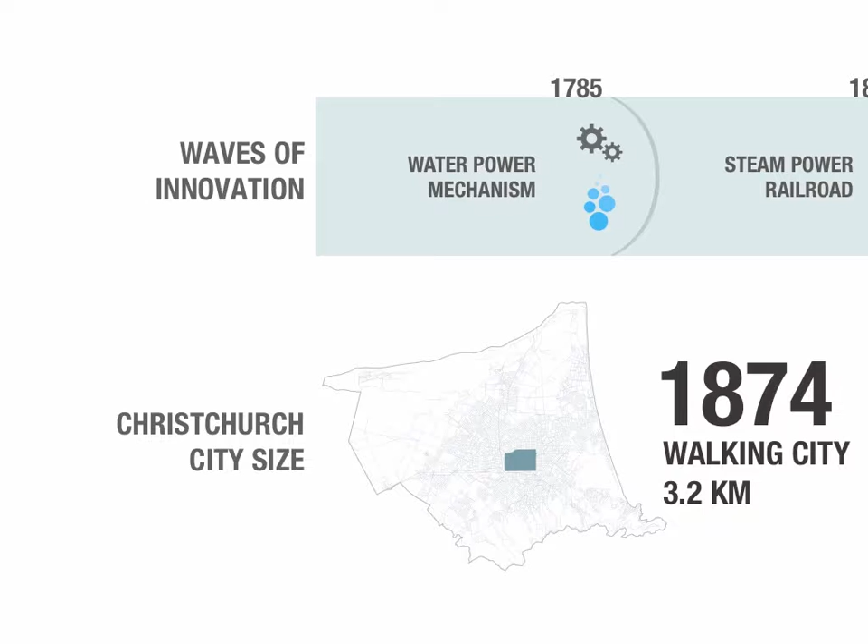Transportation technology has often been the main driver behind our city's expansion. The top is the timeline with the past waves of innovation, and the bottom is its effect to Christchurch city size. As you can see, it has evolved from a walking city to a transit city, then finally at its current state, the automobile city.

Therefore, my thesis focuses on the next stage of Christchurch. What will be the next technology that dictates the future urban form? How do we push Christchurch past the automobile city? Do we really want to keep expanding, knowing that petrol prices will only keep rising?

So in order to do that, I began investigating the current issues on personal vehicles in Christchurch. Here in Christchurch, cars are a necessity. Without cars, you have no other ways of getting around. This has been problematic for many cities around the world, but how does Christchurch actually compare with the rest of the world?

In New Zealand, it currently ranks at number 4 worldwide, with 615 passenger cars per 1,000 people. And when comparing between three major cities within New Zealand, Canterbury has the highest vehicle ownership at roughly 0.8 vehicles per person.

This preference of personal vehicle ownership leads to high demand for road widening, leaving little money for public transport due to low demands. Hence results in low public transport patronage and services, leading back to high preference of personal vehicles, and this is currently the vicious cycle of the public transport. So how can we break this?

I believe it can be done through using modern technology to effectively change our social behaviors. Because in most cases, the target problem isn't the amount of vehicles that we own, but the number of occupants that matters. In fact, 79% of all journeys to work are conducted through personal cars, but 95% of them have only a single occupant. Not only is this super inefficient, but it also takes up a huge amount of space on the road during peak times, hence the congestions.

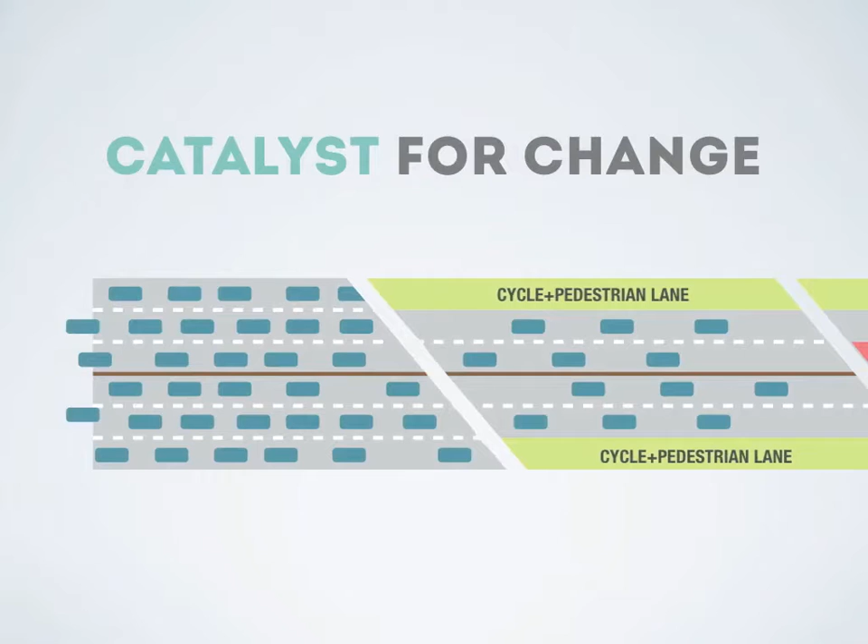This way, everyone's input can help create a much safer and friendlier car sharing community. I believe this application can act as a catalyst for many future benefits of the whole transportation system, because it has the potential to spread virally amongst its car culture population and change the urban fabric.

These amounts of abundant cheap car parking available, it is no wonder that public transport is forever suppressed by personal vehicles. These car parks, if reclaimed, can then be utilized much more usefully, such as for housing, education, parks and recreation, innovation projects from my colleagues in the other presentations.

This then brings me to my urban proposal. It is certain that the earthquake rebuild will result in an influx of workers. So, with this forecast in mind, it is very hard to ignore the lack of efficient transport when Christchurch faces an impending population spike in the near future.

So therefore, firstly, I'm proposing to revitalize the existing rail for commuter use. As the rebuild approaches, the demands for new land and new homes are expected to soar. The press has illustrated many of the existing and emerging subdivisions in the regions, a lot of which are located near the increasingly critical north to south corridor. Therefore, the fact that there is already existing rail infrastructure gives Christchurch an opportunity and access to high quality and high speed transit.

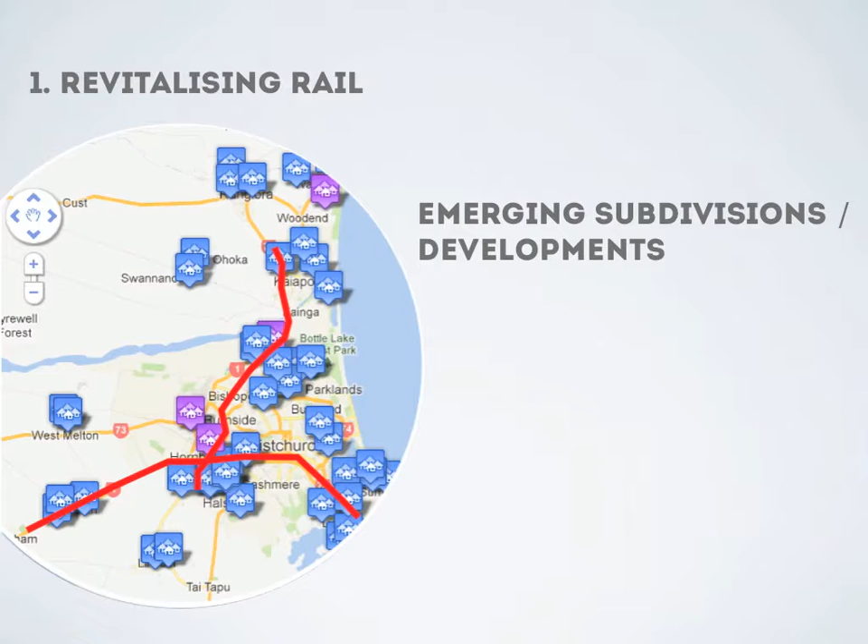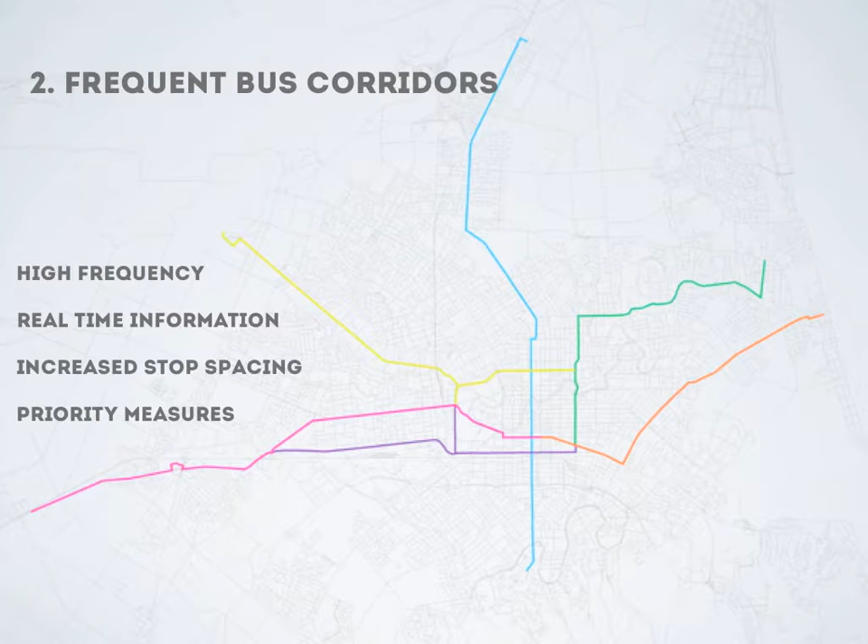This is Moorhouse Avenue on the south side of the CBD. Its current layout of a 7 to 8 lane road can be improved by changing to a median bus lane that offers dedicated space for public transport.

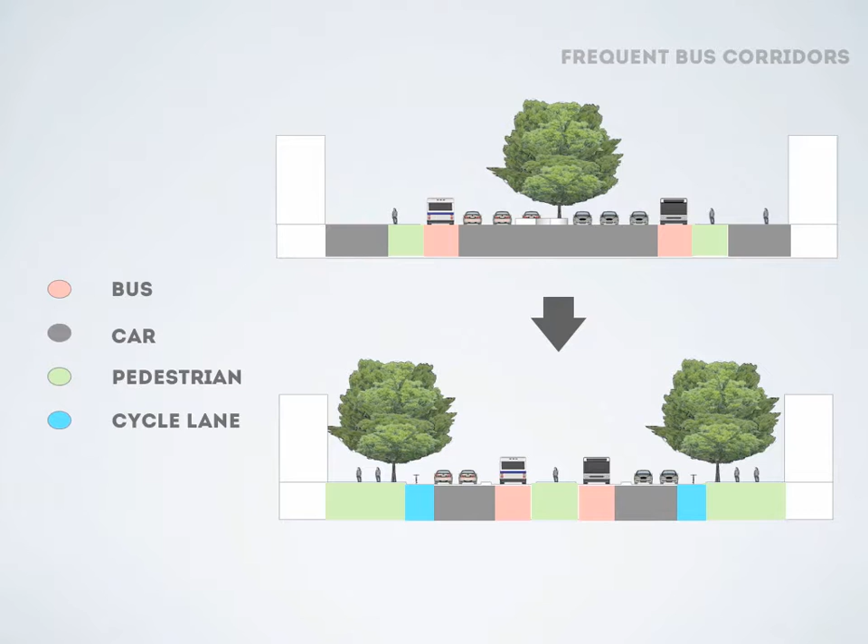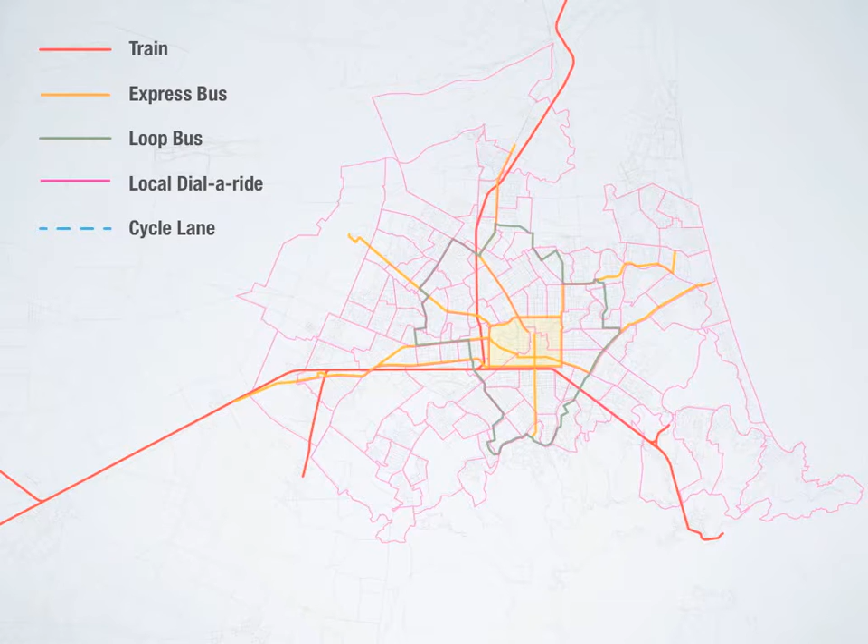On this map is my proposed public transport network: rail, express bus, loop bus, and a more flexible local dial-a-ride and cycle lanes. Bike sharing stations will also take a huge part in this bike-friendly city. These will be part of the whole transportation network and scattered within the urban fabric.

Better Place is a company that has built innovative networks for electric vehicles to finally make sense. And the vital component is to have switchable batteries in these vehicles. Hence, having battery switch stations will also be part of this proposal.

KiwiGo will also be deeply integrated with these public transport systems, for instance, locating bike or car sharing services nearby. It will also provide thorough information and choice of commute through multiple modes of transport.

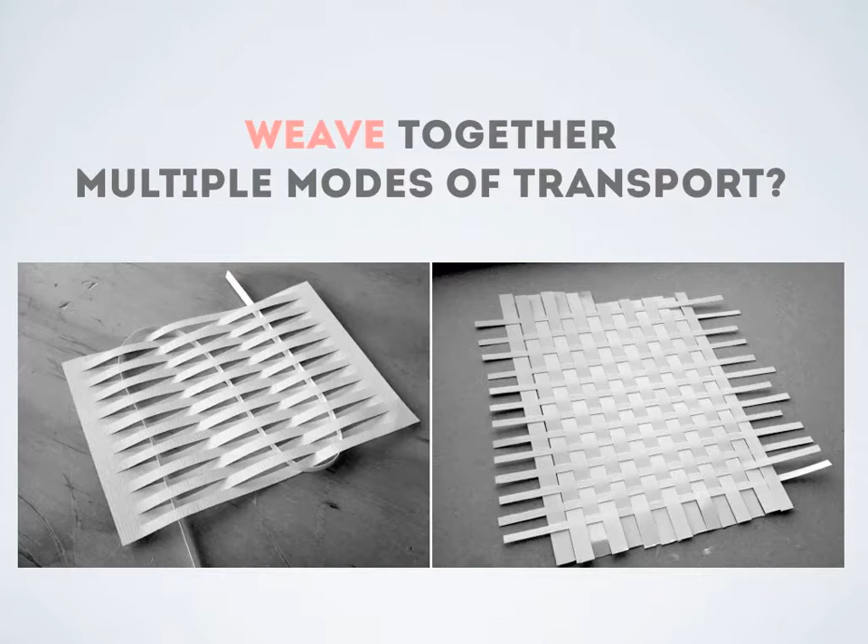I have then arrived at the point of designing the transport interchanges to accommodate the various transportation modes that I have just proposed. The initial concept I wanted to achieve was, how do I weave together multiple modes of transport? So I began experimenting with paper strips and weave patterns, looking to devise a modular system to allow these transport modes to not only flow seamlessly together, but be spatially woven together as well.

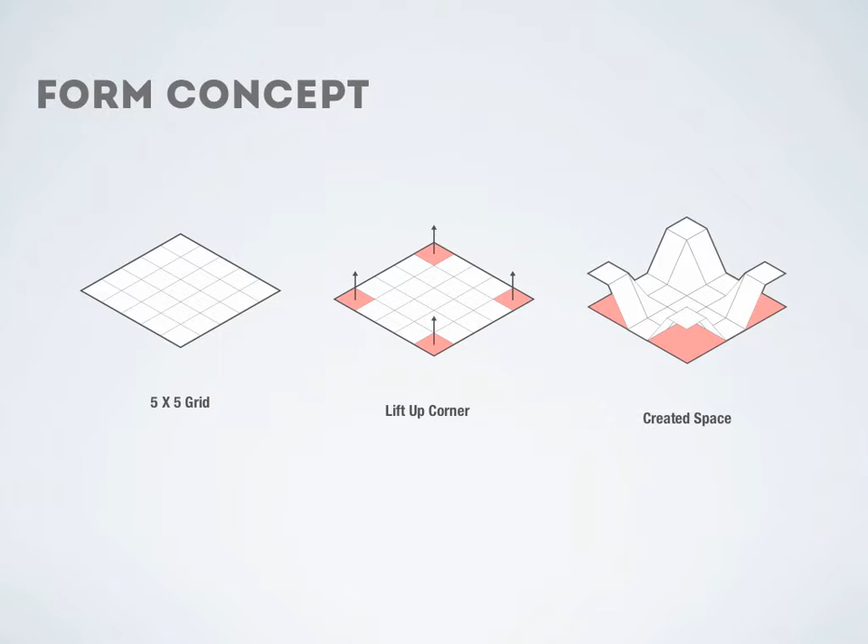So I started off with a basic form of a 5x5 grid, then lifted up the four corners to create the spaces underneath. This created spaces for 2-axis movement, and this form can be modular, arranged in various ways.

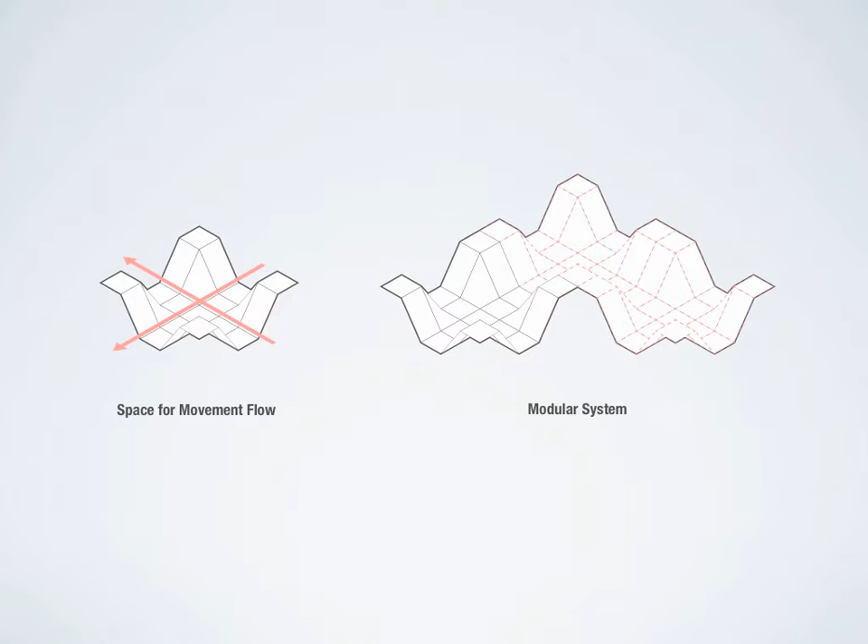However, I thought that this form was pretty limiting and did not offer much flexibility. So I cut out strips of this base module, but through different arrangements it created a hierarchy of movements, as well as vertical circulation if placed on different levels. This is a more flexible system that can work at different scales because of its simplicity.

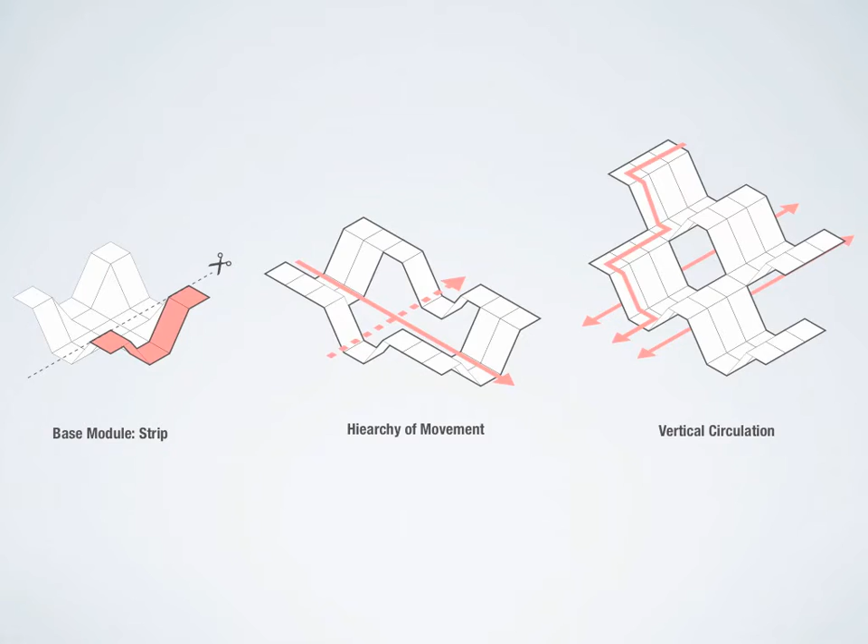I have also categorized my building proposals into 4 scales, ranging from small, medium, large, and extra large. Each of these will accommodate a different combination of transport modes. So let's begin with the small.

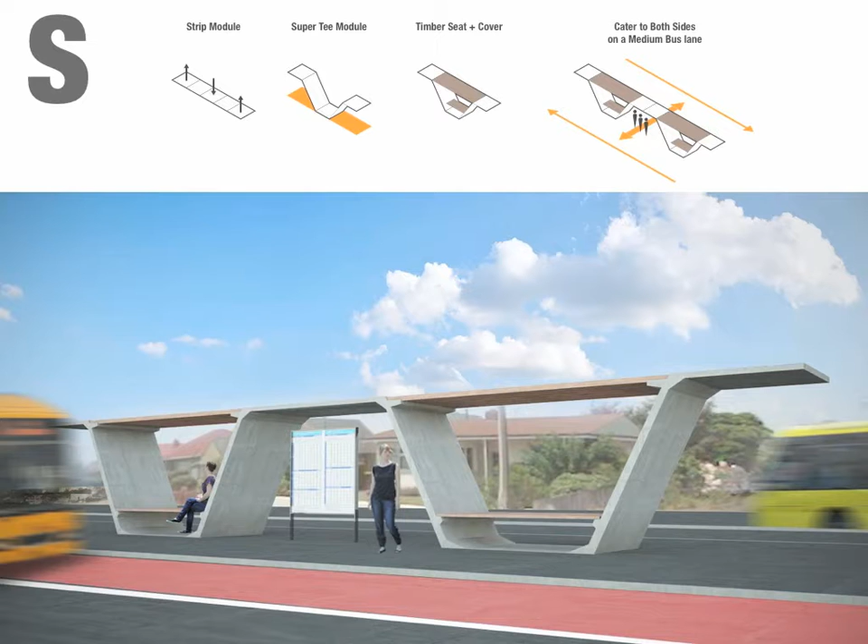I took a basic strip module that I had and lifted the 2 ends. It created what looks like a typical precast Super T section that's used for most highway constructions. But by placing 2 modules together, it created an elegant and minimal bus stop design that caters to both sides

of the medium bus lane that I proposed as my urban strategy. Next is my medium scale design. I used the previous form, the T section, and by rotating it 90 degrees it created 3 separate spaces. If this form was used for a medium bus lane, the middle area would be used for

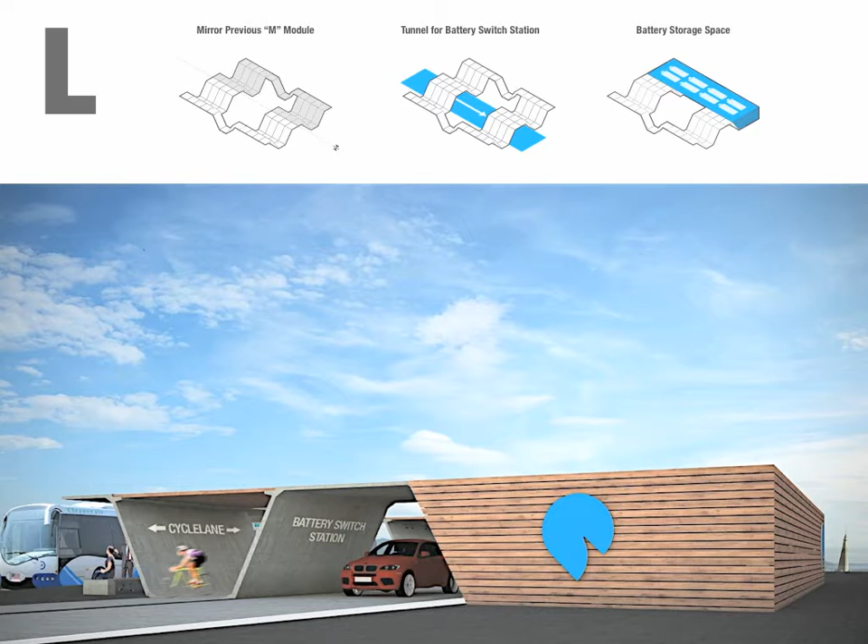dedicated cycle lanes, while the 2 outer spaces can be used for bus stops. Next up is the large scale. Again, I took the previous medium scale form and mirrored it. This created a larger tunnel that can be used for a Better Place electric vehicle battery switch station, and the leftover spaces will be used to store these batteries.

The image illustrates how the 3 modes of transport, bike, bus, and cars, are woven together by the structure of this design. Next is the extra large scale. I placed the 2 strip modules along the 2 sides of the railway track, then extracted the outer edge of the module and lofted an arch over the railway.

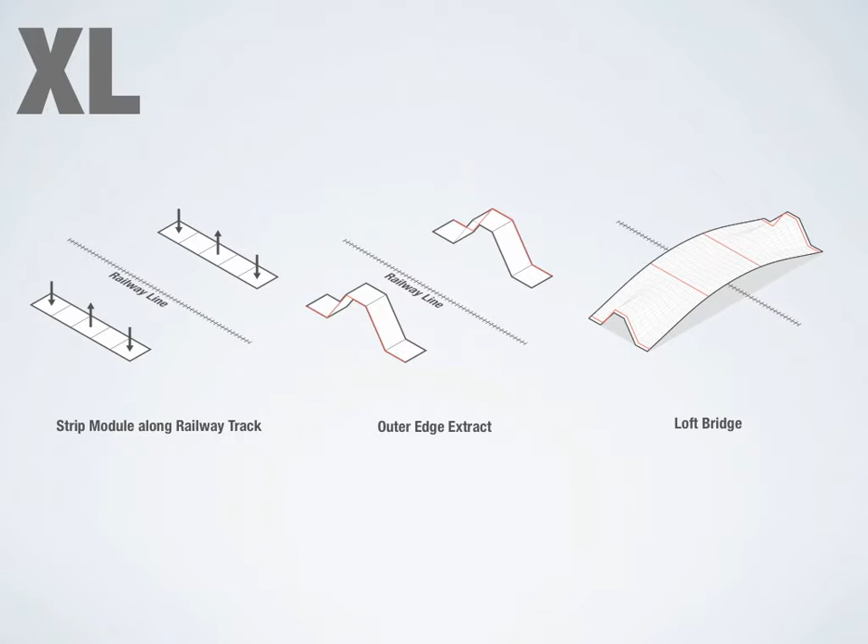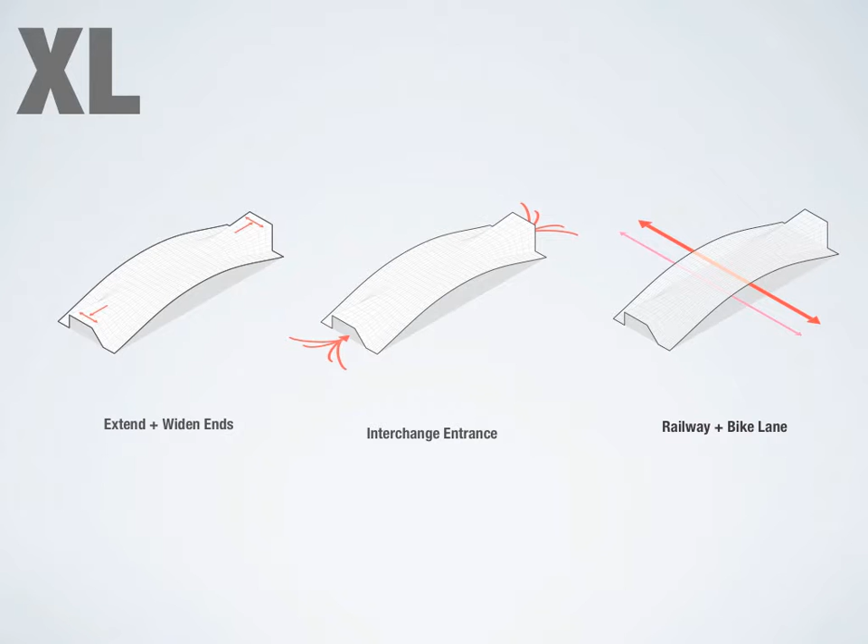I then extended and widened the ends, which created an interchange entrance. So with this form, the railway and the bike lane will run in parallel underneath the structure. The roof of the structure will be accessible, essentially making this form both a building and a footbridge that connects

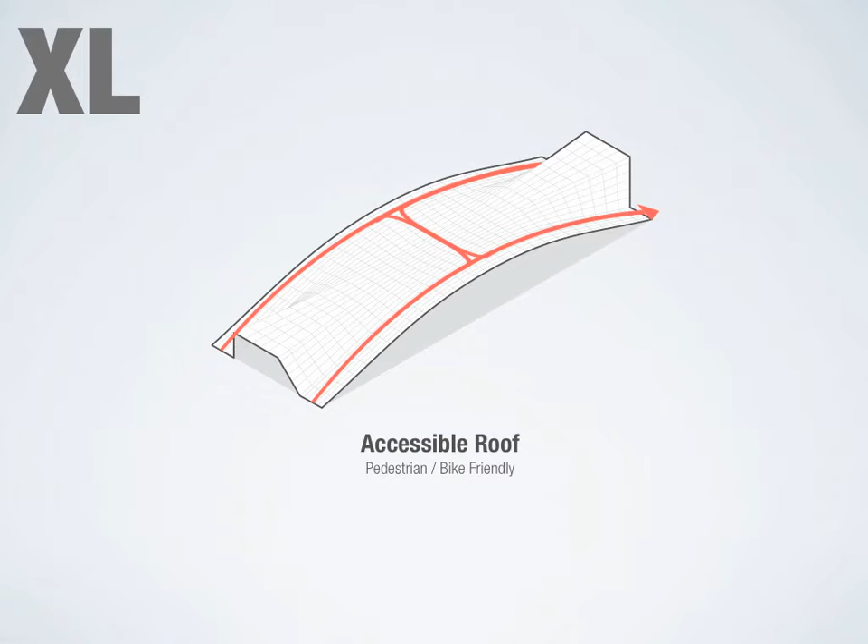the 2 sides of the railway track. Then this is the visualization of this moment. The middle strip of the roof will be outdoor public spaces.

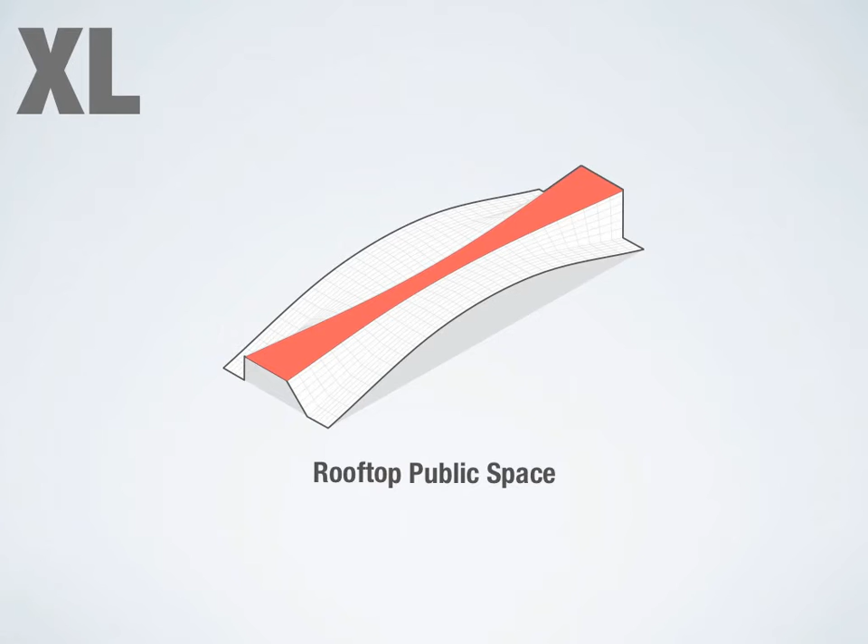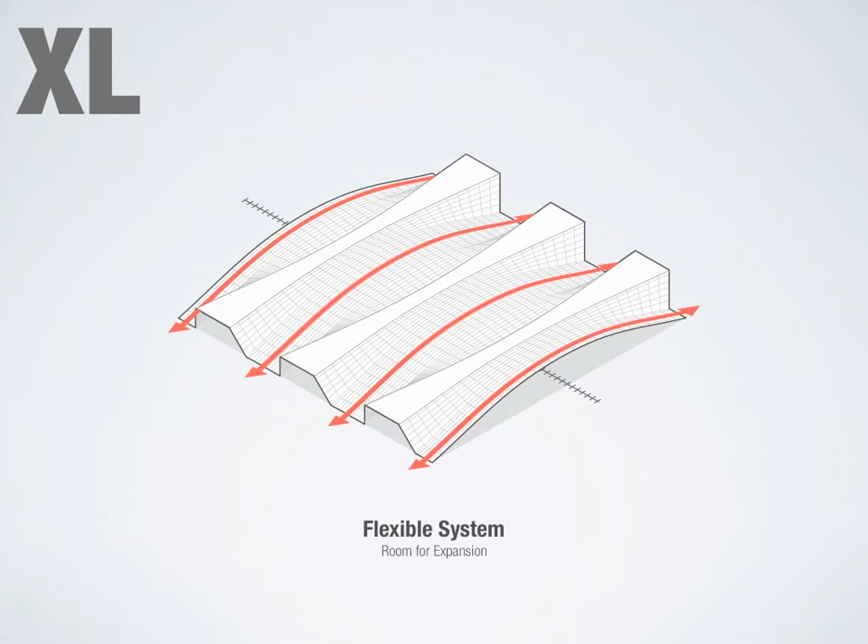And this is the visualization of the nighttime where the roof can be seen used by the public. Due to its self-sustaining structure, this module itself presents as a flexible system and can be extended if required. This is an interior view of the arching structure.

So I guess by now you're probably wondering, where will this be? Where is the site? Well, even though these proposals are not site-specific, I have chosen an area that suits these various scale interchanges, which brings me to a case study for Papanui.

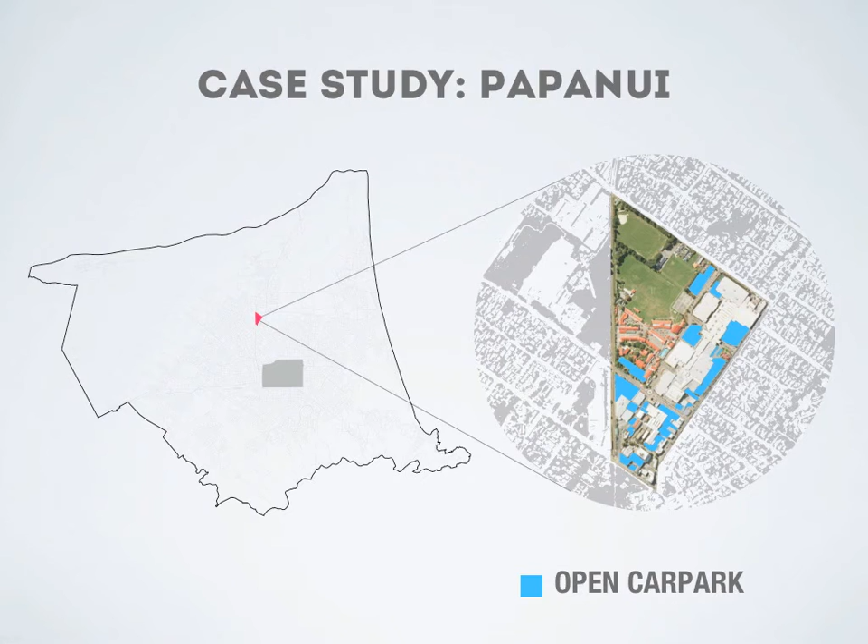This is a site marked as one of the key activity centres in Christchurch, hence has enough open car park for reclamation. This site also happens to be the crossroads of multiple modes of transport that I previously proposed as my urban strategy.

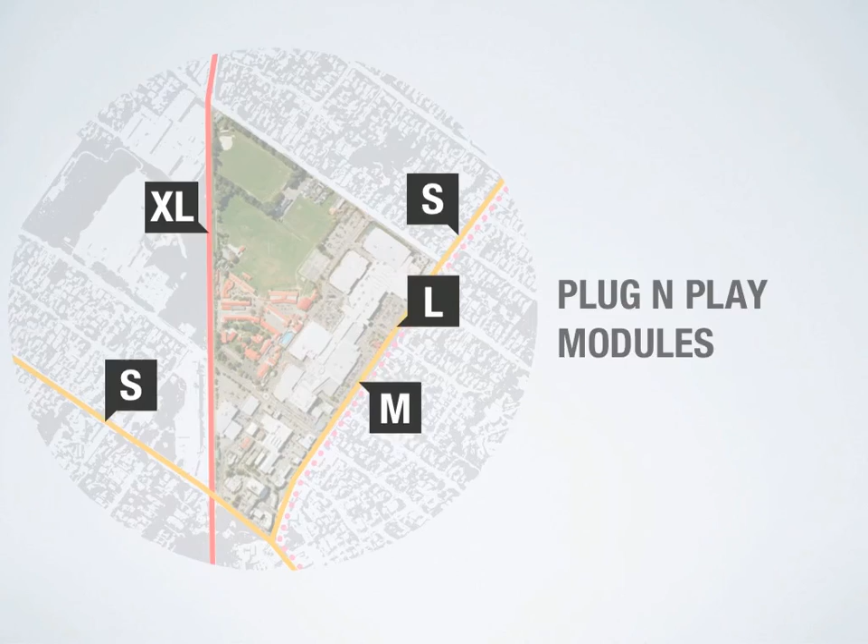Therefore, this site is the perfect example for slotting in these small, medium, large, and extra large modules. And because of this flexibility of the modules, they can also essentially be plugged into any part of the city, depending on the transport mode it serves.

So to sum up my thesis, it is about rethinking our existing transportation network, identifying its flaws, such as single occupancy vehicles, and resolving it by using existing resources we already have, but in a much more efficient way. I hope after this presentation, next time you're driving, I urge you all to look around and

count the number of single empty seats around you, and think about the huge potential and market presented to us each day as we sit through hours of traffic, trying to get to the same places. My urban architecture approach is a reflection of this issue, aiming to push Christchurch into a multimodal city and towards a much more efficient economy. Thank you.